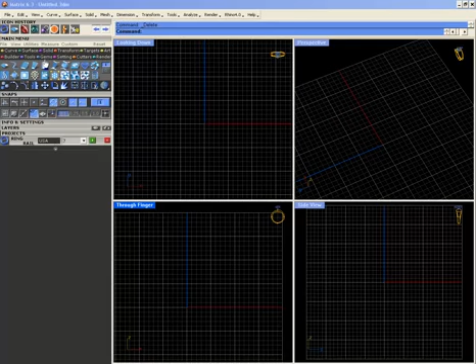5.5 mm. Okay, any click that's a right click, I'll mention it. All these clicks are left click. You'll understand when you go through the basic videos from before. You know how to select and how to drop them.

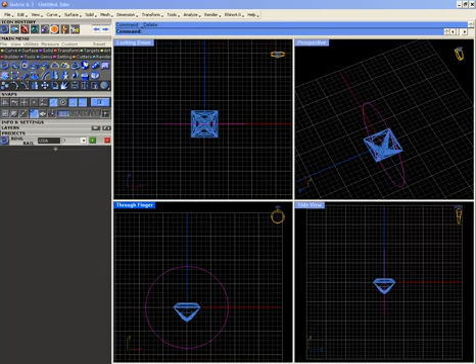Okay, tools, ring rail. Select this one, move. My ortho is off, I use O spacebar for ortho. Okay, from here move it up 1 mm, 1 enter.

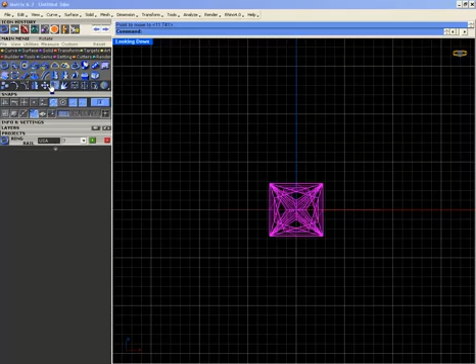Looking down, rotate, F4, make it around 30 degrees. Yeah, this is good. 40 degrees? No, 30. 30. Yeah.

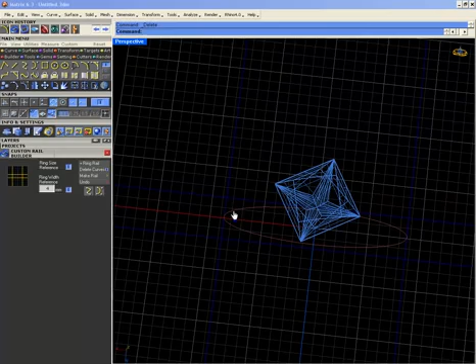Okay, now we have this, we can use this custom rail if you want. Okay, arc from top view, from here to here and here. Okay, make it. Alright, we got this one. And this is what we need.

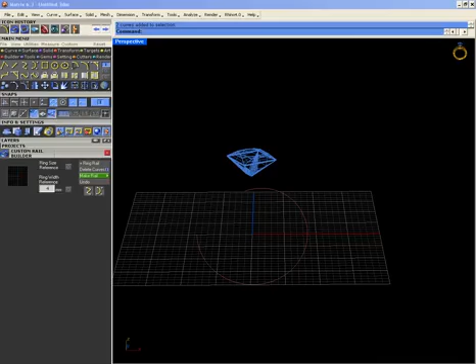You can make it half. Let's say I trim this curve, a line, F4, straight down, and then I trim it with the trim option. So I have it half. I select both of these, I join them, and then I rebuild.

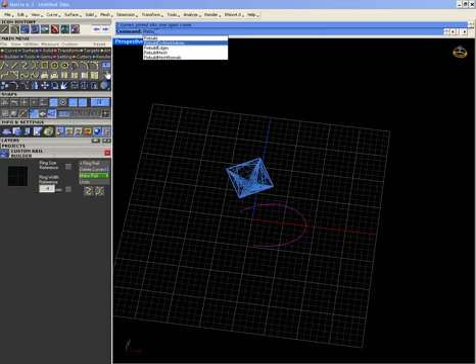You can type here or you can go from here, you can choose it from here. I have a habit of typing, so I prefer to type. Let's take it 7.3. Okay, make sure it's joined. If you don't join, then you have two curves with each 7 points on it. Okay, so this is what we need.

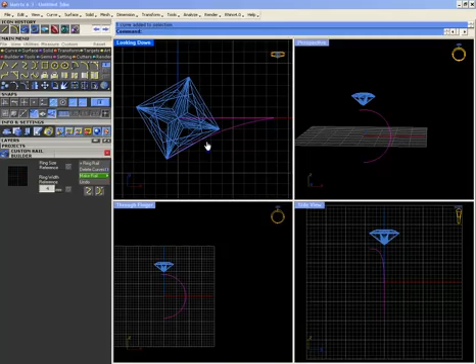Okay, good. We have half rail, and it's matching at this end.

So what I'll do is F6 profile placer. I'll have a profile at this end. There should be 2 mm, and there should be 1.5.

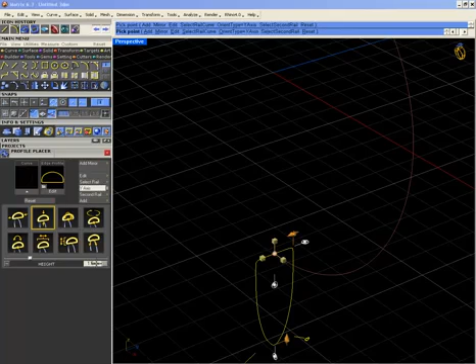Select this one, F6 MSR, click here and make this 1.5. Okay, I'll make this 3 mm so we have a good look. 3 mm. Okay, add.

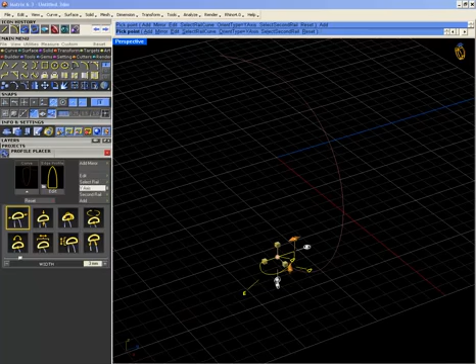I'm gonna have it exactly at the mid position. Yes, this is good. So we can keep the same position if we want, or we can minimize. Let's keep it the same, if we need we can change it.

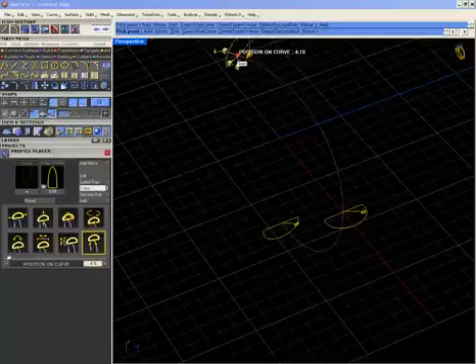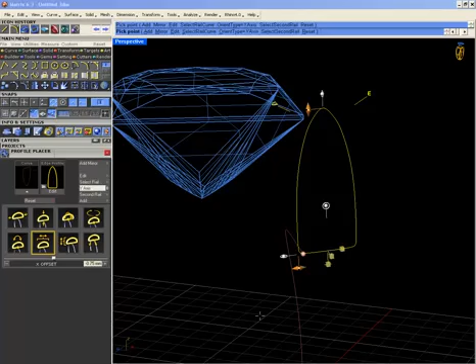So add one more and drag it to the upper side. Now here it should be bigger, you know, covering my diamond, and I use the X offset and I change the profile. This is good, this is good.

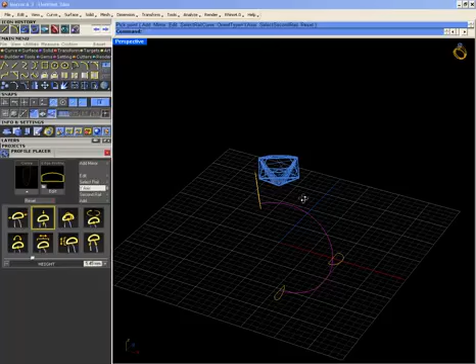Extend it. Okay, and that's it. Now select this one, sweep one history. Oh, wrong selection, I selected the rail, so I'll press escape, undo, select this again, F6, sweep one history, this, this, and this. There you go.

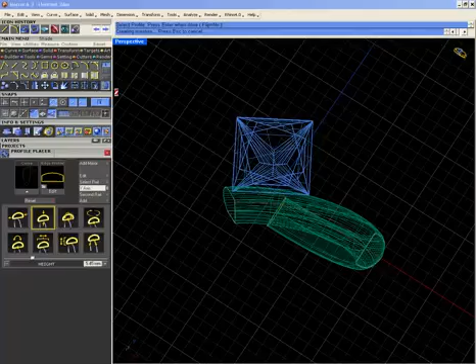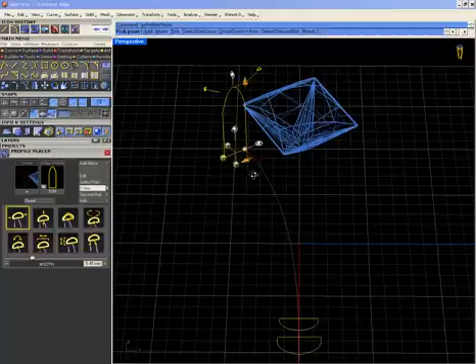Okay, it will look good if we just try to twist this profile inside, so we have a good look. So undo, select this one, F6, MSR, a bit, and then inside. This could be even better.

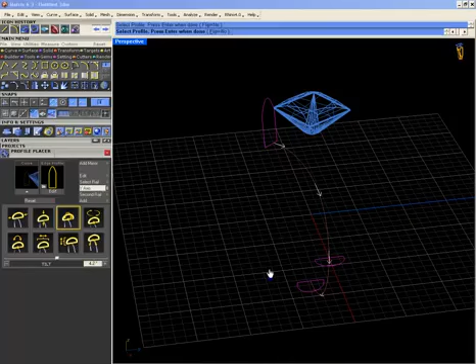Okay, sweep 1 history. Okay, this looks good.

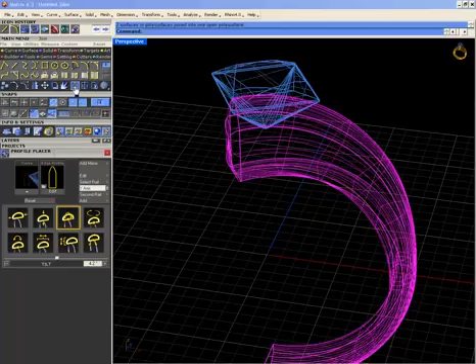And then select this curve, F6, profile cap, and just drag it out. Okay, this is good. Select these two, join them together. Now I'm gonna use, you can use an array polar to make a duplicate. Center of array polar, F4, number of items 2, enter, enter. There you go, see?

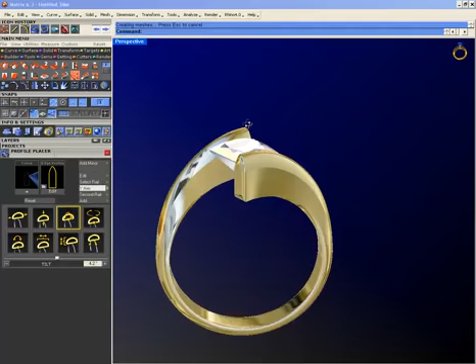Okay, so now we're gonna create a base for this ring. Okay, it seems like the diamond is half, it's not completely touching the shank.

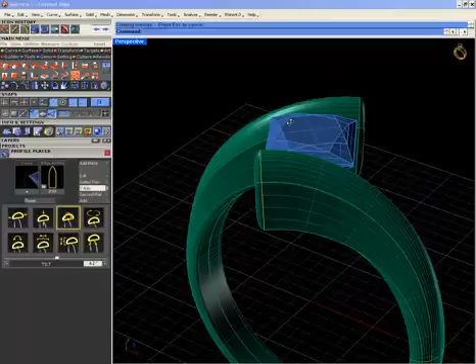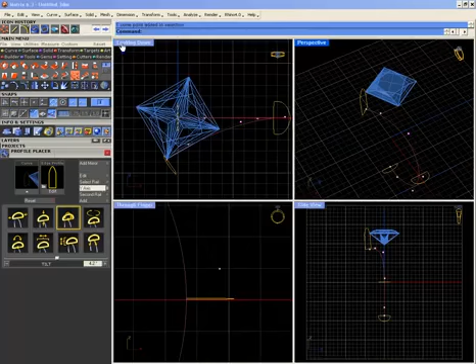So what we can do is change it a bit inside, move it a bit inside the shank, so we have a good fit. Okay, so undo, undo, undo, and just play with the curves. Move it a bit up from the looking-down view. Ortho is on, and there you go. Good.

Make sure you don't spoil your ring view through finger viewing, because if you try to move it like here, you can see in through-finger view the shape is getting changed. So make sure you move up and down.

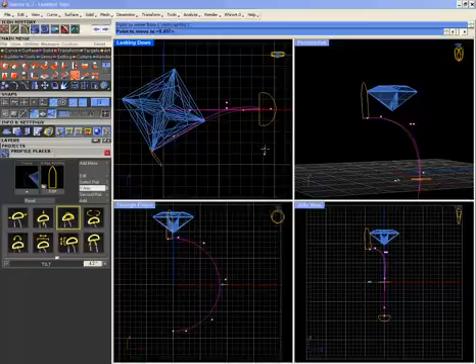So this is done. You can even add a profile if you want, or play with your profile. You can make it bigger and a bit inside, so you have a good hold of your diamond. F6, sweep 1 history, select this and this, enter.

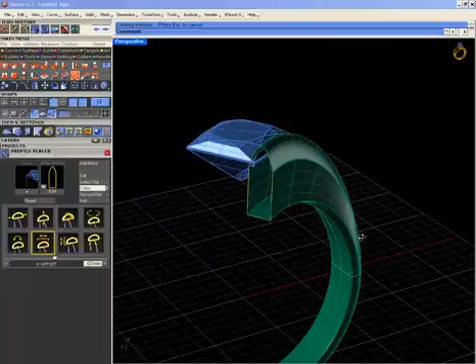Or let's say if you want to play with your profile, you can edit them, get some points on it, select them both, and raise them with move option and point option on.

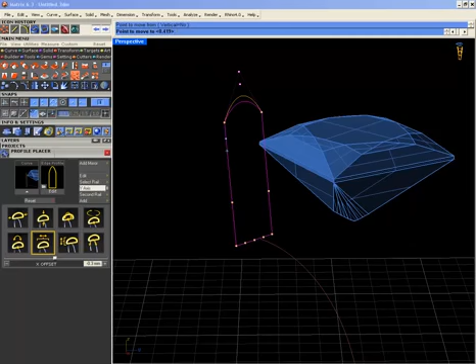Okay, turn off the project, point to point, move it up, and move this down, move near option on. This is near, I guess. Yeah, there you go. Okay, move near, a bit up, yeah. So our snaps help us to get the perfect position and everything.

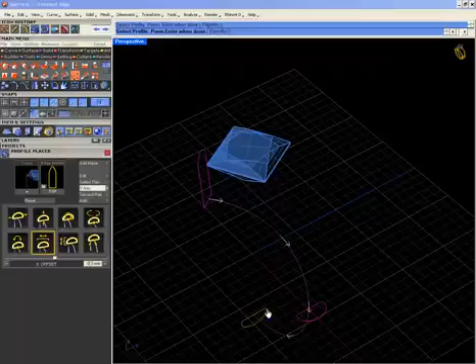Sweep 1 history, click here, click here, click here. There you go. Now it's good, it's completely inside the shank.

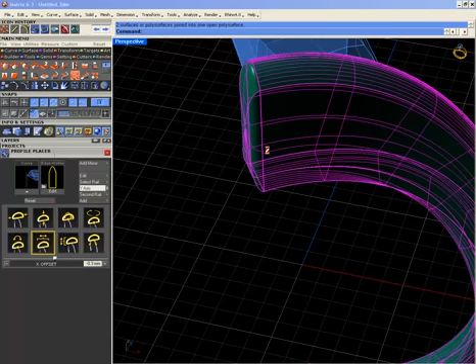And finally we make a profile curve, profile cap, sorry. Select them, join them. You can use Ctrl+J to join them, or you can do an array polar, or you can simply rotate them. Rotate command, F4, click anywhere, use the copy option here, and 180, enter. There you go, that's it, it's done.

Join them together. Okay.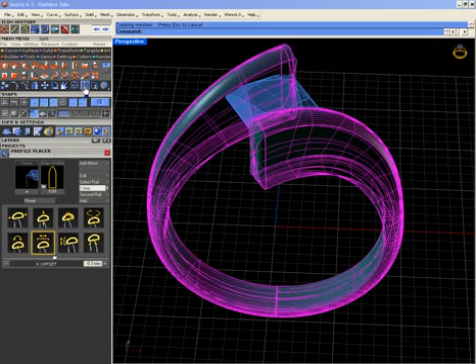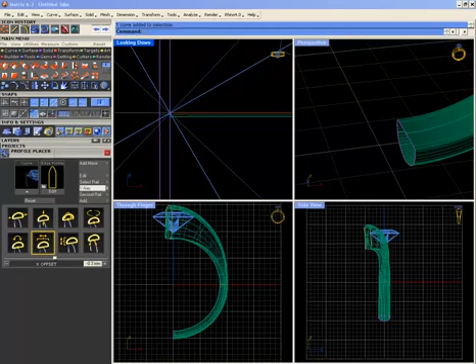And finally we check some naked edges, as it's okay. You can see here the profile curve is not in the middle. Yeah, we can see from here it's not in the middle. So what we're going to do is delete this one and project it.

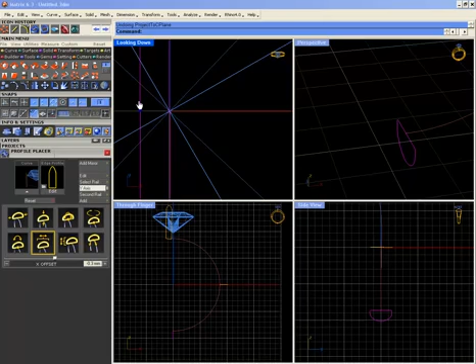Project to C plane, delete input, yes. Okay, now it's flat, we can have a look from the end view. You see it was not flat, it was like this, and so when I project it, it becomes flat. So when you copy it to the other side, you have a perfect copy.

Now I do a sweep one history.

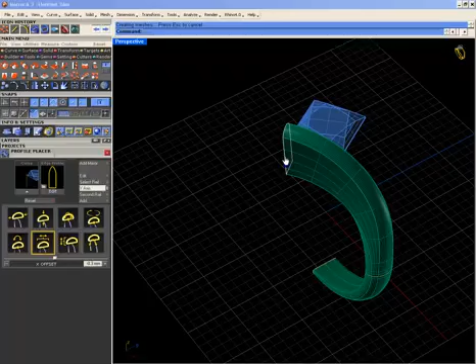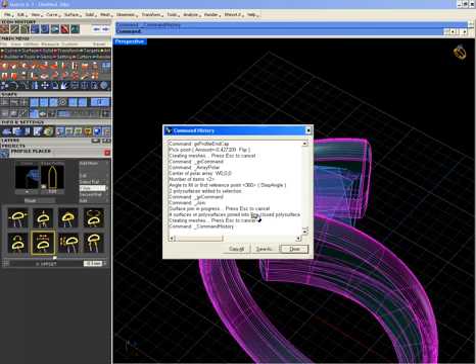Join them all together. Yeah, and see this time you have a closed polysurface. Four polysurfaces join into one closed polysurface, which is a good sign. It should always be closed. If it's not closed, then it means you have a problem with the object. So this is a perfect design.

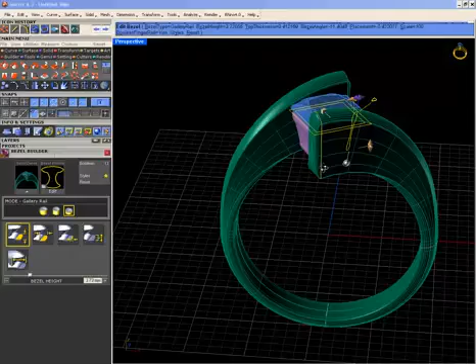Okay, with no problem. So we select this one, press F6, and then we create an under bezel for this diamond. Now the under bezel will have a thickness of around 0.8.

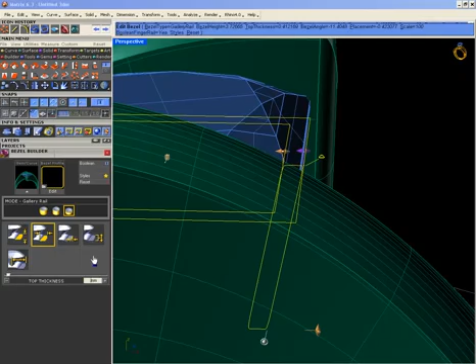So we select this section, a normal square kind of section, so we have a good view at the thickness. Click on it, make it 0.75, or 0.8 is good. Yeah, this is good, let's make it 0.885.

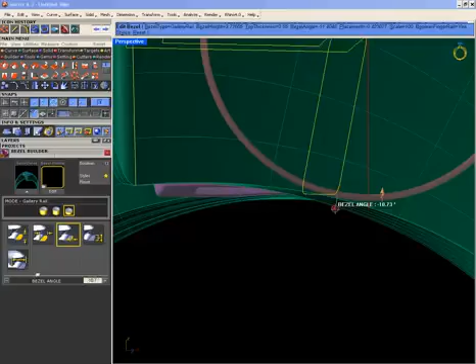Okay, and make sure it's connected to the wall. It is. If it's not, then you can slightly bring it outside and have a look from this view. Sometimes you have less taper like this, so this is not correct, so make sure it's connected properly. Have a look.

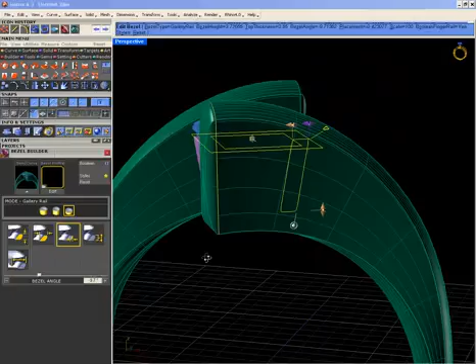Okay, this is better. Bring it down if you want. Okay, perfect.

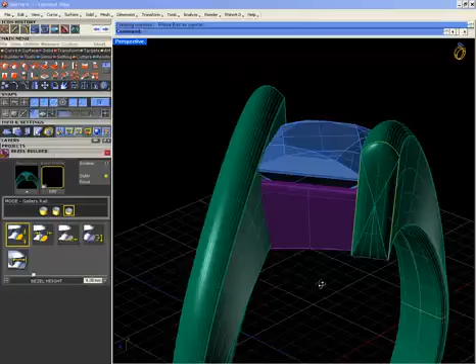All right, right click, and that's it. A single stone ring is ready.

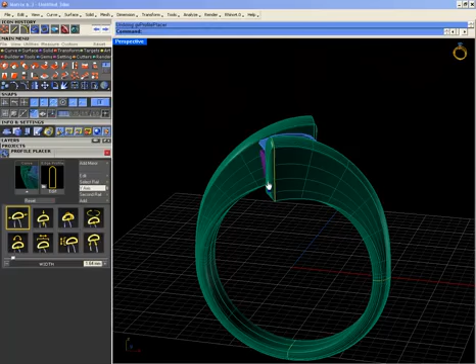We cut here, we can cut here, you can also minimize the thickness. Can you show me its photo? Yeah. You see, it's okay, this is our rail, there's no problem.

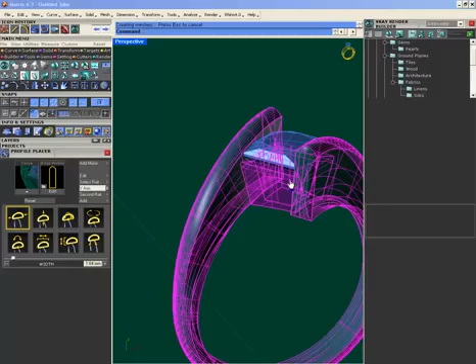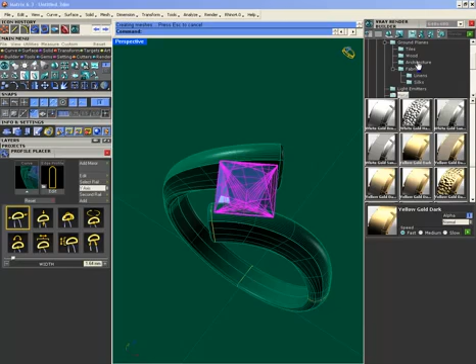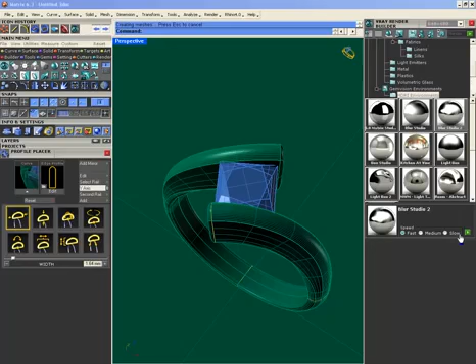Okay, that's it. Finally we go to the render image. Render button. Okay, we use this one, and finally press this render button. Right here. So can you show me the photo?